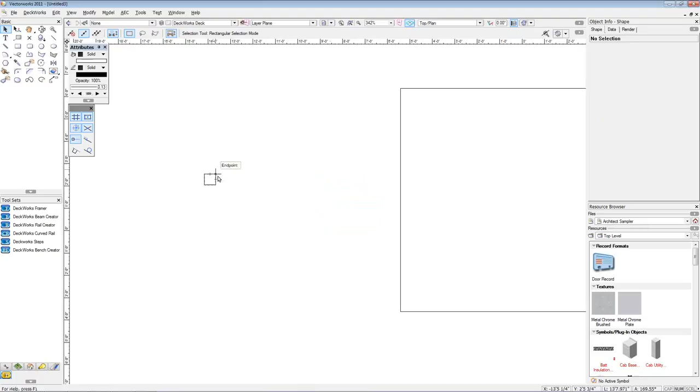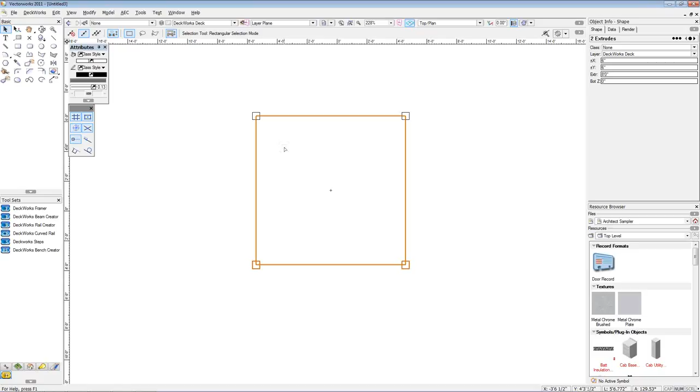Now that we've created this 8-foot tall 6 by 6, we can place this on the corner of our 10 by 10 square and simply copy this 6 by 6 around to every corner. You can also use the mirror tool with both of these selected. Select the second option, click the midpoint in your square, go horizontal, left click again, and you'll see it'll place the additional ones in there. Now we can delete our 10 by 10 area. So select it and press the delete key on your keyboard.

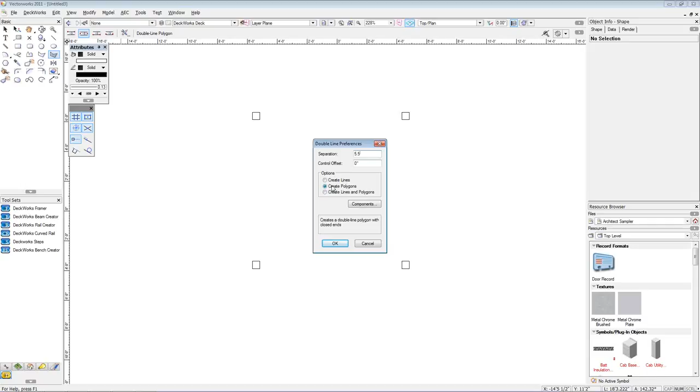Now we're going to take the double line poly. You can also hit Alt 8 to get into there. And we're going to select the wrench and pencil up top to modify the thickness. I'm going to type in 5.5. Make sure that your second option is selected, Create Polygons, and press OK. I'm also going to select the center justification key up top. So we'll start on one 6 by 6 and simply draw to the center point of each one, and we'll go up to this top one and close it off.

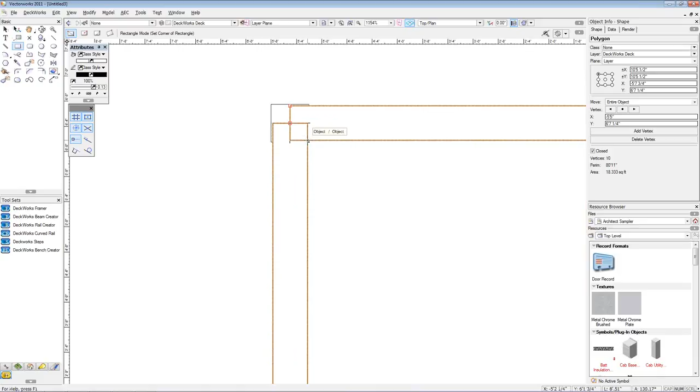If you get this situation where it doesn't completely connect, you can take your rectangle tool, fill in that space, and then once that space is filled in, you can select that square as well as the 5.5 inch double poly that we've drawn, and go into your Model tab and press Add Surface, and it'll clean it up for you. Now we're going to hold down Control or Command again and press E and extrude this 7.5, or any dimension that you want it to be, and then we're going to go up into our front view.

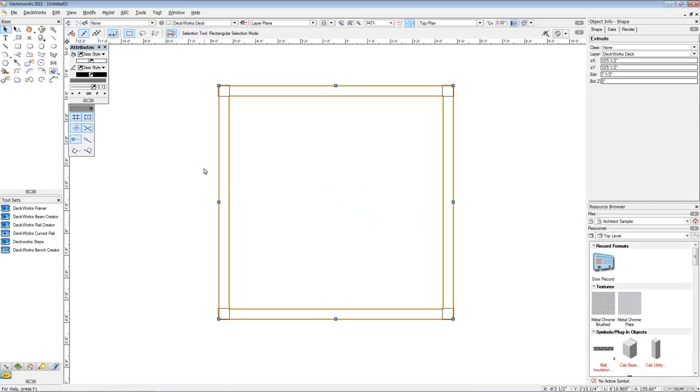Now we're going to take this and simply move it to the top of our 6 by 6s, and we're going to draw one of the slats in this view. So once again, we're going to take the double line poly and we're going to change it to 7.5. And we're going to draw this slat roughly in the area. Double click to end, and we're going to move it down into place.

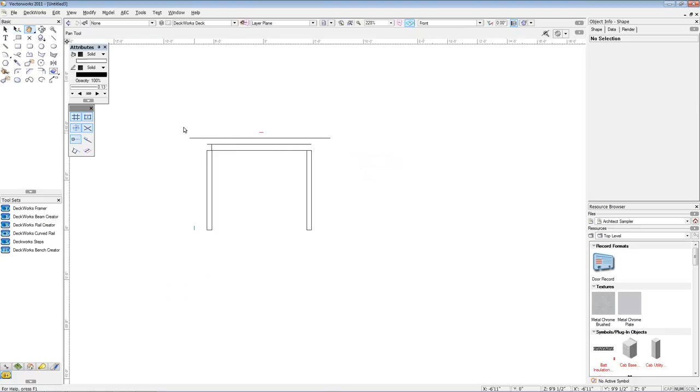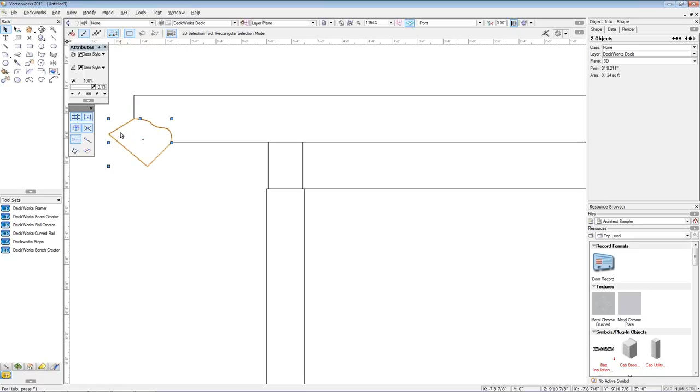Now once this is in place, we're going to give it a little bit more of a decorative look. So we're going to take our regular polygon tool, which is the number 5 key, or it's located right here on the screen, and I'm simply going to click a start point and draw a nice little arc here and close it off. What we're going to do is subtract this shape from our slat. So by selecting both objects, we're going to go to Modify, Clip Surface, and then we'll select the little shape that we've drawn and press the delete key, and you'll see that that's there.

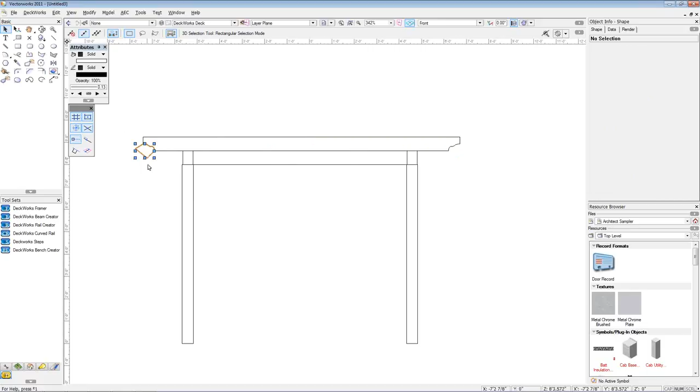If you don't press delete, you can actually take that same image, mirror it to the other side, and make the exact same clip on this side. So we're going to go up to Modify, Clip Surface, and now we're going to go back and delete both those shapes, and you'll see that we have our correct slat. We can also hold down Control or Command, press E, and we'll extrude this 1 inch. Now if I switch back into a top view, you'll see that it's located here.

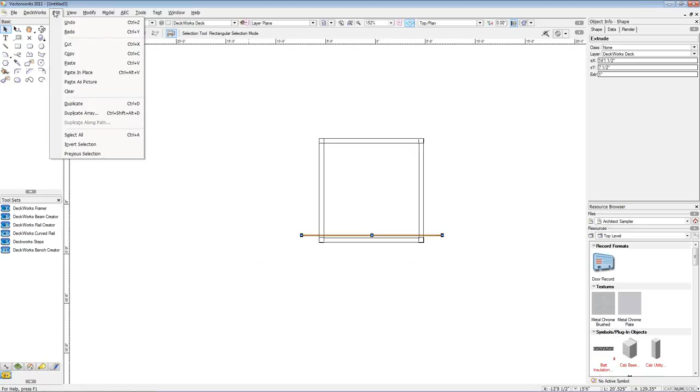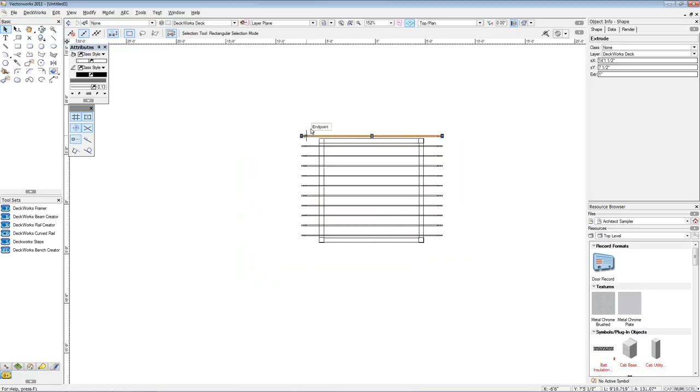We'll put it into our start location, and with this selected, we're going to go up to our menu up top, and go into Edit, Duplicate Array, and we're going to basically relocate this slat going up. So I believe we go into the Y here, add 12 inches, press OK, and you'll see that they'll actually duplicate up. We can also click the excess slats off, and then when we rotate this up into 3D, we'll add an OpenGL rendering to it, and you'll see that our trellis is done.

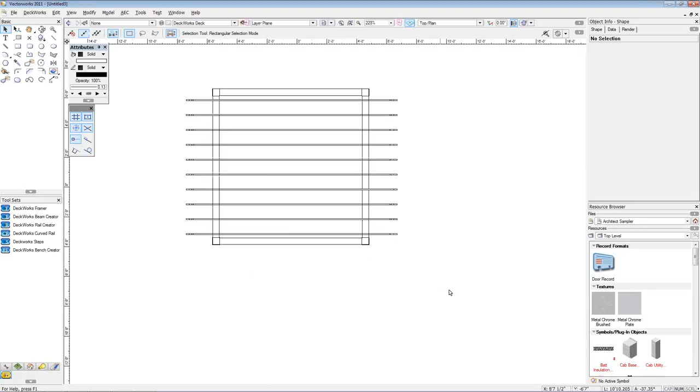And that's the steps that you would go through to create a custom trellis. You can do these at any shape, any size. They're fairly easy, and once you're done you can always go back into your top view, highlight everything, come in here to your menus up top, and go into Modify, Create Symbol, and then you can type in your symbol name, press OK, and then OK one more time.

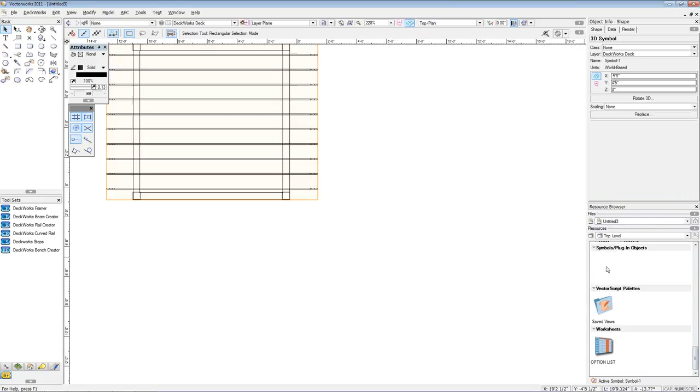And then once you've done that, if you go into the actual file that you're in, so we're in Untitled 3 currently, I'll select Untitled 3, and if I scan down to the bottom you'll see the symbol that we created, and you can simply drag and drop as many of these as you would like, and it'll continue to save it so you won't have to draw it again.